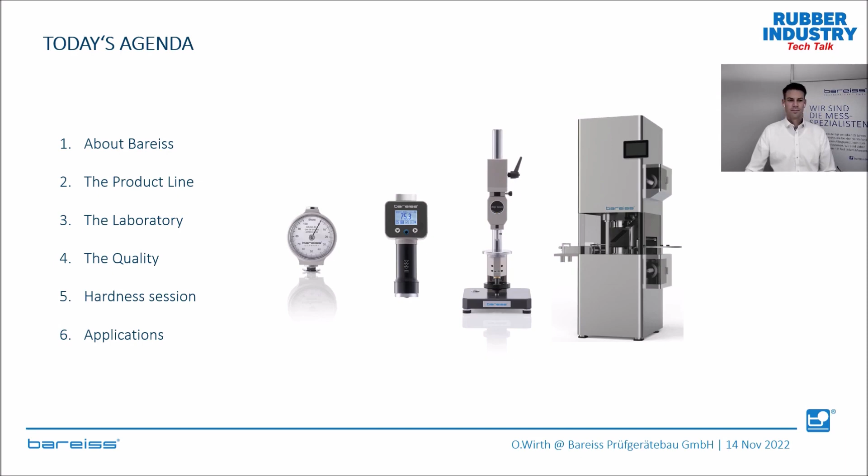So let's go back in history and see how it all began. Even as a child with limited resources, our grandfather Heinrich Bareiss had the technical skills to build models that could

fly and drive. After training as a mechanical engineer, he joined the Navy and spent the next 2.5 years on a submarine during World War II.

While spending the time on the water in the submarine at great depth, Heinrich came to the realization that the study of materials was of great importance.

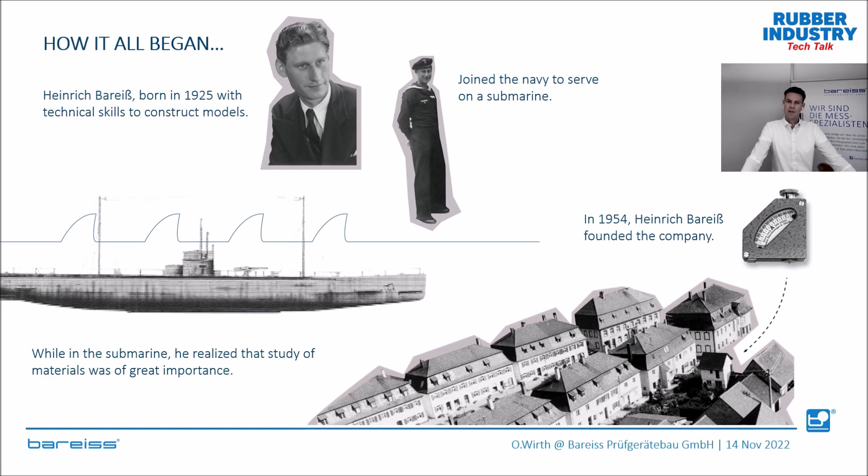In 1954, Heinrich Bareiss' vision to start manufacturing mechanical hardness testers became a reality. The company was founded in Upper Swabia, Germany, in the basement of a residence, which is only 100 meters away from the headquarters nowadays.

As you can see, Bareiss originally comes from hardness testing and made a lot of new inventions in that specific world. It all started with the mechanical durometer on the top left, followed by a test stand in 1961 and

the very first flexible tabletop devices in 1972. The corresponding up-to-date products can be seen on the right.

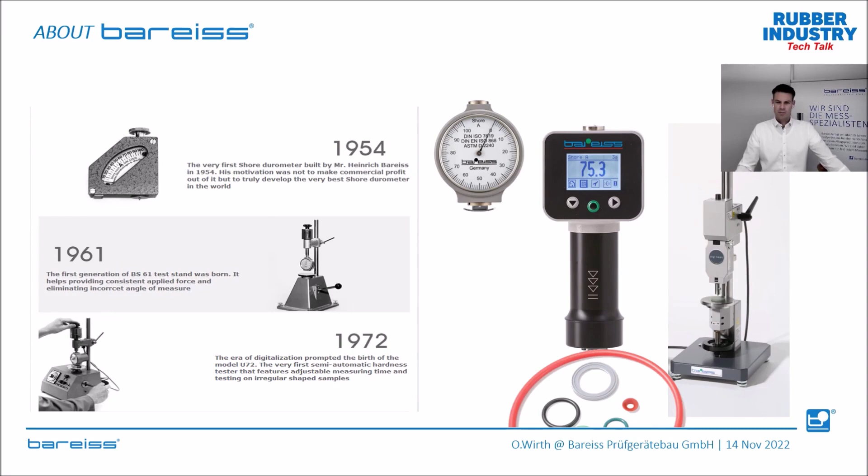But how does the company look like today? I just mentioned that the company was founded in 1954, and that we are a family-owned business in the third generation. Together with my cousin, Catherine Shen, I am the managing director of Bareiss.

We have 4 subsidiaries, including the location in Hong Kong, and we have a production area in Oberdischingen, Germany, of about 4,000 square meters.

One of the keys is the high in-house fabrication rate of almost 90%, which gives us the possibility to make quick changes in customized products and so on.

We have a lot of patents and obviously lots of customers worldwide.

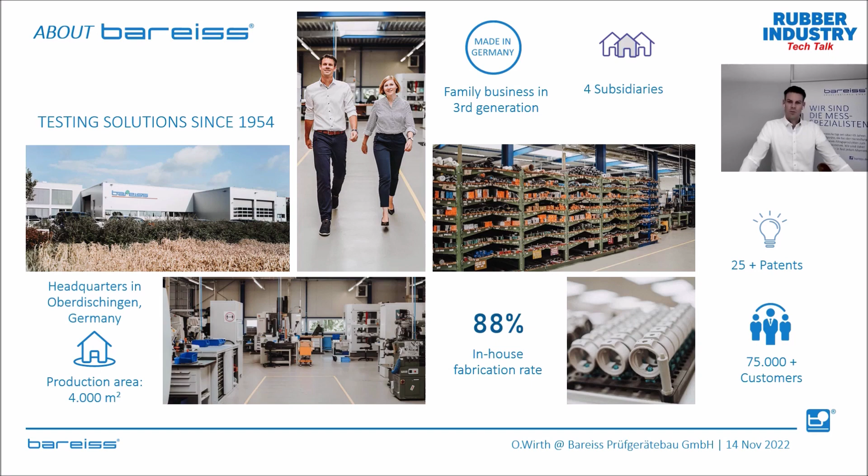So summarizing, we are a company with a high passion to develop new test methods, with a long background of experience.

In combination with our ISO 17025 accredited laboratory and the membership in various standard committees all over the world, like for example DIN in Germany and ASTM in the US, it is the best combination for you as a customer

to get more information about your materials. We are really dedicated to developing new test methods and to standardizing them.

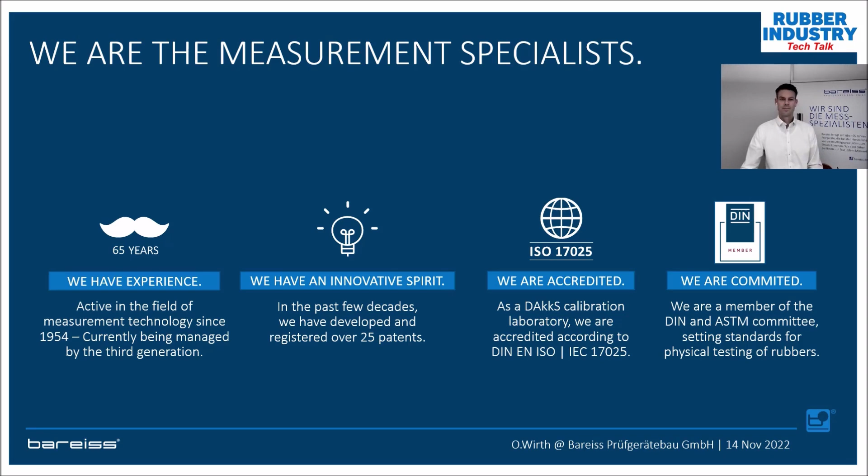We do have our own subsidiaries in China, in Taiwan, and Canada. But besides these locations, we have lots of resellers and distributors, as well as service partners all around the world.

We are located in 35 countries to offer our best support to you, so we are your partner worldwide.

To give a quick overview about our product portfolio, I listed the main products on this slide. Besides these, we also have products for sample preparation like punching presses and cutting devices, and also other physical

test products like compression set and so on.

On the next slides, we go a little bit more in detail into the different categories shown here: hardness, rebound resilience, abrasion testing, and rheology.

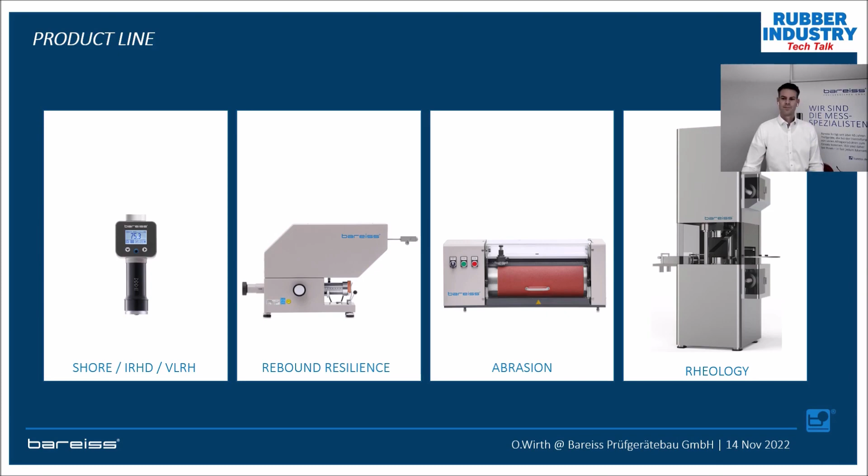Let's come to the hardness section. In this line, we offer all test methods ranging from 000S to Shore A to Shore D, as analog devices, analog durometers, and digital durometers as well.

But we also have the flexible tabletop devices for your laboratory, where you can have the test methods from all the Shore ranges up to all the IRHD and even VLRH.

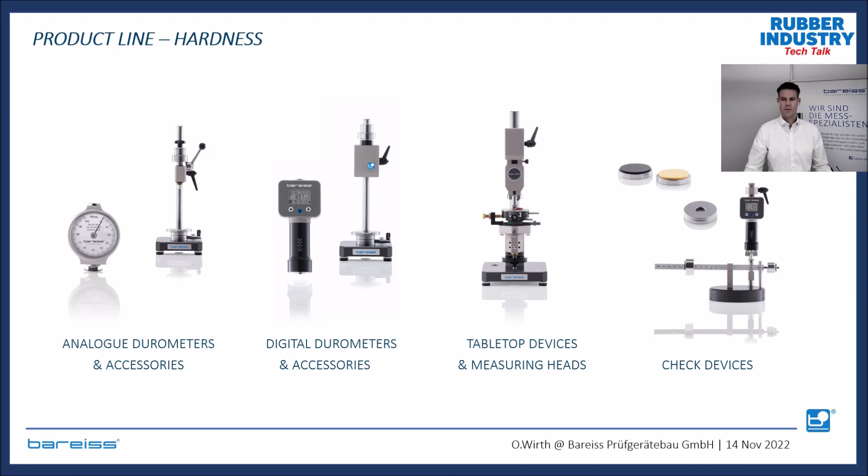And this is completed by various check devices that can be seen on the right, including test blocks that are also delivered together with ISO 17025 certificates.

And we do have the so-called Schob pendulum. This can also be purchased including a heating module and all the standard accessories.

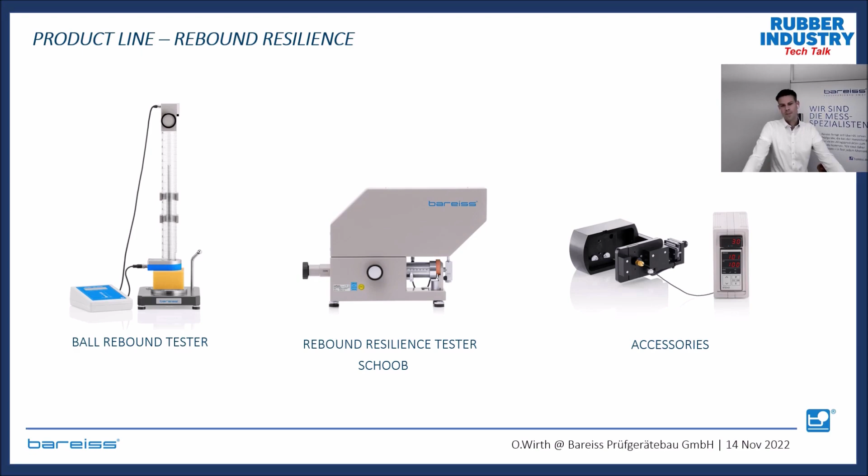This is the classical DIN abrasion tester on the left-hand side, including a cleaning device, but also available as a more advanced test method, including a heated drum. That means the drum itself can be heated from ambient temperature up to 100 degrees Celsius.

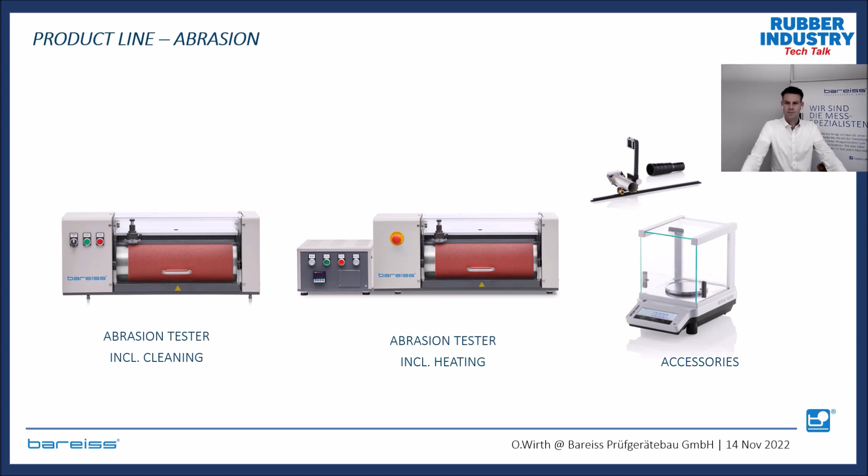And last but not least, we do offer the rheology products, but also automized machines ranging from a simple hardness and density tester up to a completely automized laboratory. For the rheology products, we will get more information in the next two sessions from Thomas and Henry.

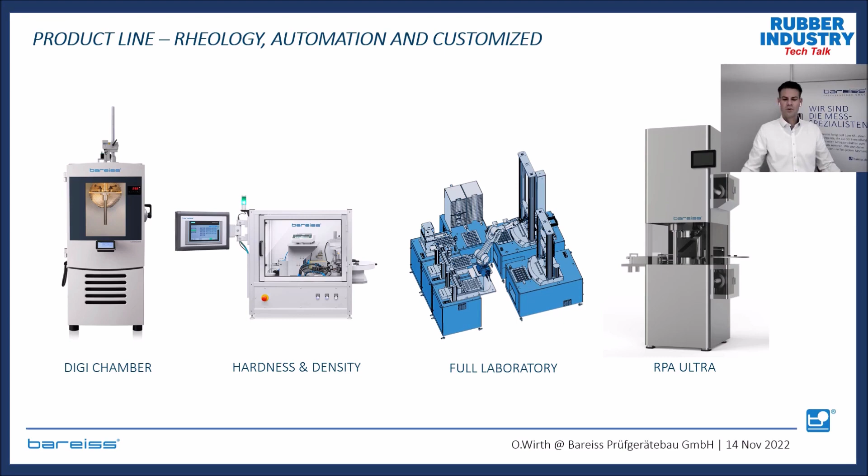So let's come to the laboratory. Together with the PTB, which is the highest national metrology institute in Germany, Bareiss created some of the most important standards in the field of hardness for rubber and plastics. For example, the calibration standard 18898, which is nowadays known as the ISO 48-9, VLRH, and many, many more.

The DAKKS is the German accreditation body for the laboratories following ISO 17025. But every country has their own national accreditation body. As they follow the same standards, they are within a network of mutual recognition agreements among accreditation bodies. This is mostly visualized by the blue logo, left of the DAKKS logo here.

So therefore, they can be seen as equal quality accreditation bodies. In Germany, for the DAKKS, the accreditations are carried out mostly by the PTB. So for you, the best combination is to purchase devices from a manufacturer that also has an ISO 17025 accredited laboratory.

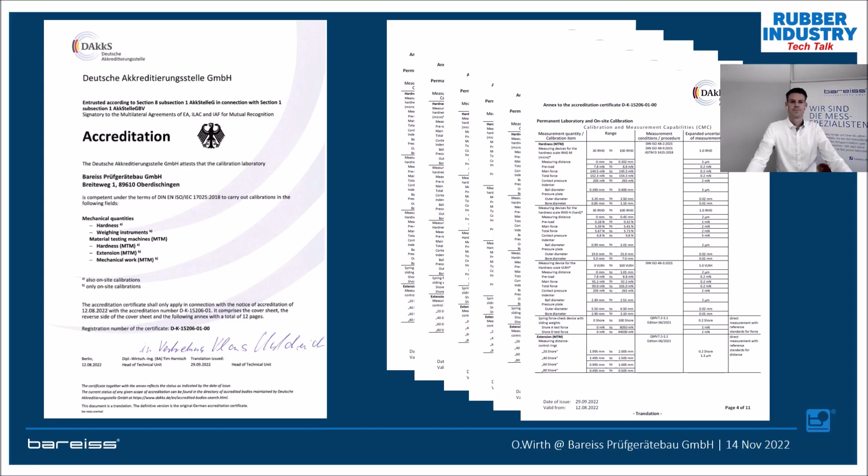Just one slide about measurement uncertainty. I don't want to bore you with this one, but it's necessary to know the difference between an ISO 17025 laboratory and a normal calibration lab. Uncertainty seems to be a negative word, but actually it's not. It does not mean being unsafe when measuring. It is paradox, but the uncertainty provides certainty to the conformity.

What does that mean? Every value, every reading that is within the green zone is within the conformance zone and totally correct. There is no discussion. The values located in the red zones are non-conform. There is also no discussion, so they are out of tolerance. The difficult part is the yellow zone, where we cannot definitely say that the values are correct and conform or not.

So the tolerance zone is given by these two lines here, the specification zone, and we have the tolerance. Even if values are within this tolerance zone, you cannot say, because of the measurement uncertainty, if the measurement is correct or not. The goal is to make this yellow part as small as possible.

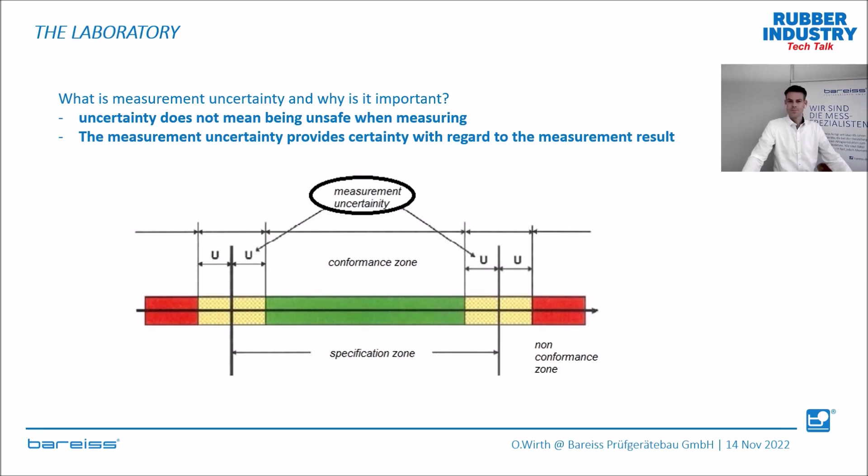Let's come to the quality of our devices. There are a lot of different hardness testers on the market from various manufacturers. Some of them are very cheap, so your question might be, for what reason should I spend more money on a durometer? What makes the difference? Well, the answer is quite simple.

The readings are more precise because of the high quality components we are using. Then we have very highly skilled employees that are professionals in building hardness testers, some of them for more than 30 to 40 years.

The springs inside a Bareiss durometer get a very special treatment before they can be used. This is necessary for long-term stability of the equipment. Even the ball bearings are handmade for every durometer, using different ball and bushing combinations. This will reduce the friction to a minimum and therefore shows exact readings, even if you have floating materials.

In this video, you can see a durometer from one of our competitors on a check device. By putting the weight on the left onto a defined position, you can double check if the value shown on the durometer is correct or not. What catches our eye is that every time we tip on the check device, we get different values, and this is due to the friction inside of the durometer.

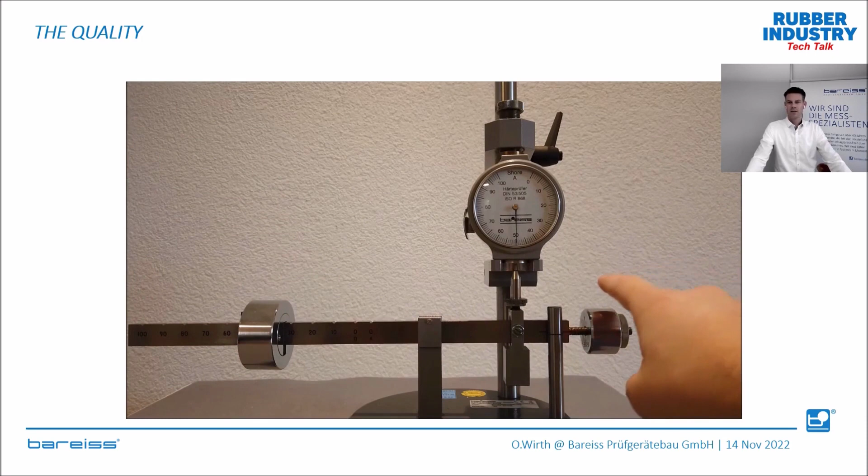Now we do the same on one of our own durometers, and you will see a completely different behavior. Every time we tip on the check device here, the needle comes back to exactly the same value after swinging around it. Now you might say this is probably a nice to have feature, but I will show you the importance on the next slide. Just wait for the video until it's finished.

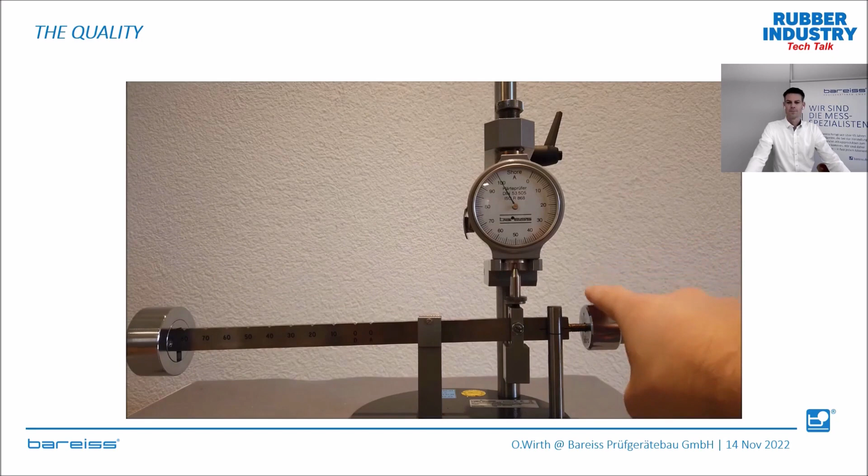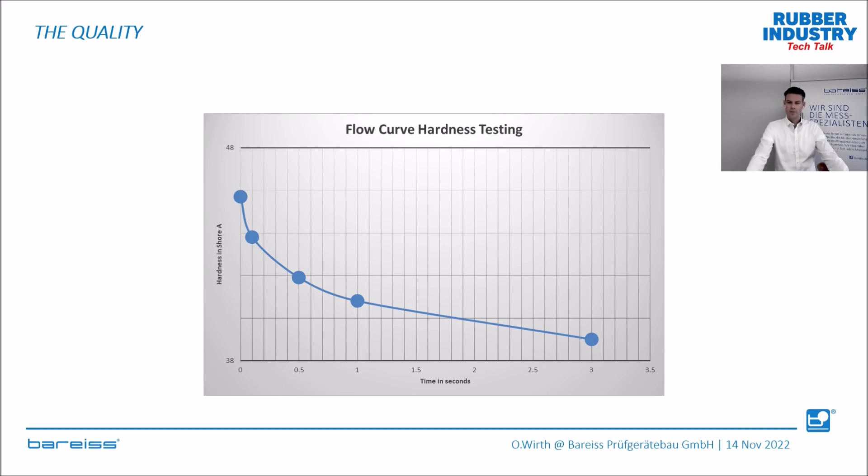This behavior happens normally so fast that you cannot see it with your eye, but it is definitely there.

So let's come to the hardness session. What is hardness? The definition is that hardness is a mechanical resistance of a material or a test piece to the mechanical penetration of an indenter.

Let's see in an overview the different scales that we have. On the left side, you can see all the multiple Shore variants that are available. As you will see on the next slides, they are used for different hardness ranges and therefore different sample geometries and materials. They all follow a linear scale from 0 to 100 and are good for flat surfaces.

We will see later on that Bareiss developed Shore A and Shore D measuring heads that can be used for all kinds of geometries, which is a huge improvement and helps many customers worldwide.

On the right side, you can see the IRHD scales, which is normal, hard, low, and micro. They are usually used in tabletop devices for production samples.

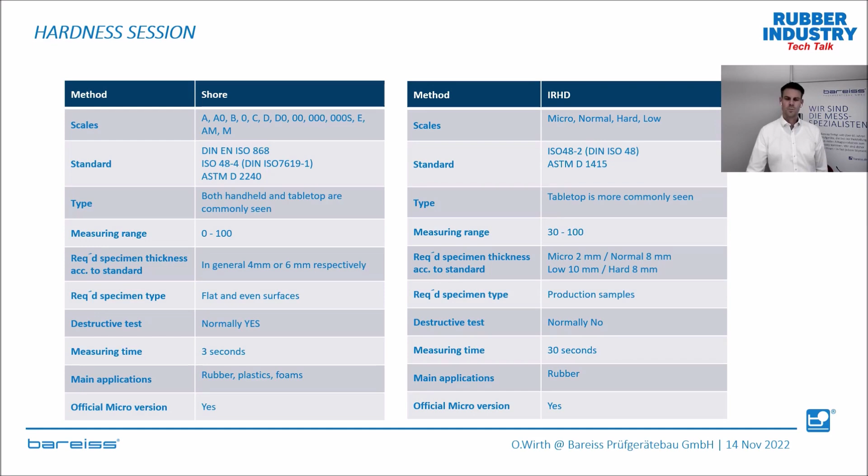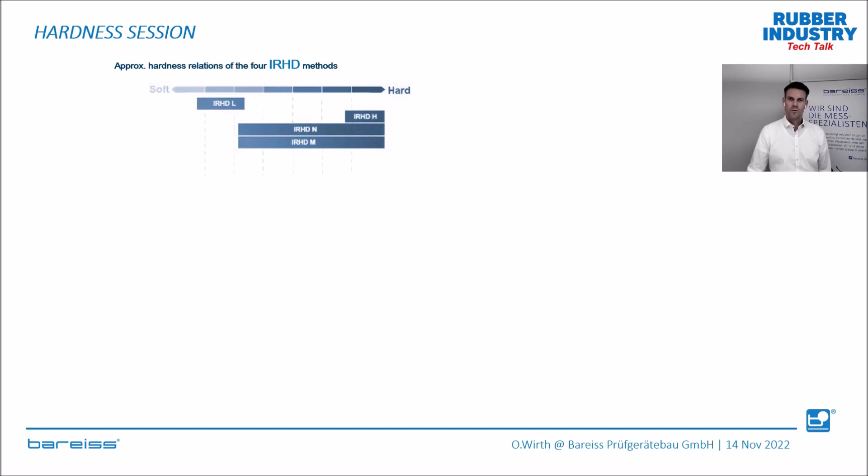Once again, a short visual overview over all the hardness scales. First of all, we have 4 different IRHD methods. For very soft rubbers, Bareiss introduced a standard some years ago called Very Low Rubber Hardness, VLRH. This test method gives the possibility to measure below IRHD normal with a very high differentiability. So you have 100 readings while you have just some values on IRHD low.

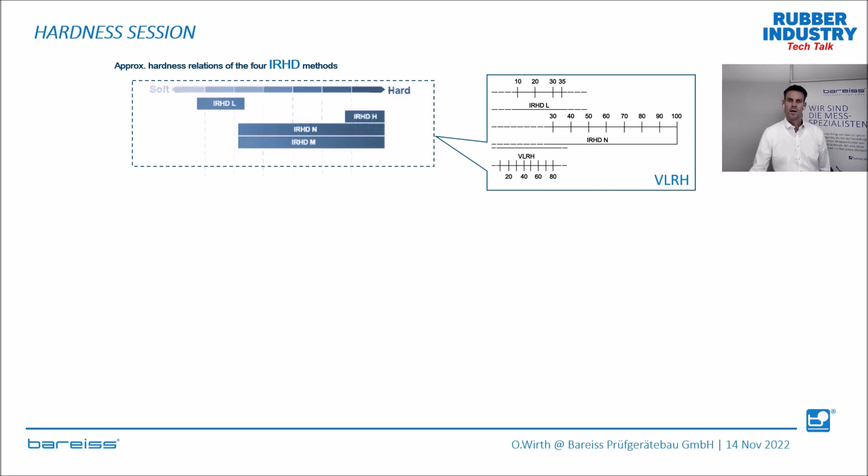And we have the Shore methods. The main scales are Shore A for rubber and Shore D for mainly plastics, meaning if the sample is harder than 90 Shore A, Shore D scale should be used. The zeros are mainly for foam-like materials, and there is a micro scale in the same hardness region as Shore A for thinner specimens, but this method is not used too much in the industry.

Therefore, Bareiss invented an alternative to this method, called Micro Shore A and Micro Shore D respectively, which is directly comparable to the real Shore A and Shore D values. But most of all, what the rubber industry is interested in are the scales Shore A, IRHD-N, IRHD-M, Shore A on curved surfaces, and Micro Shore A.

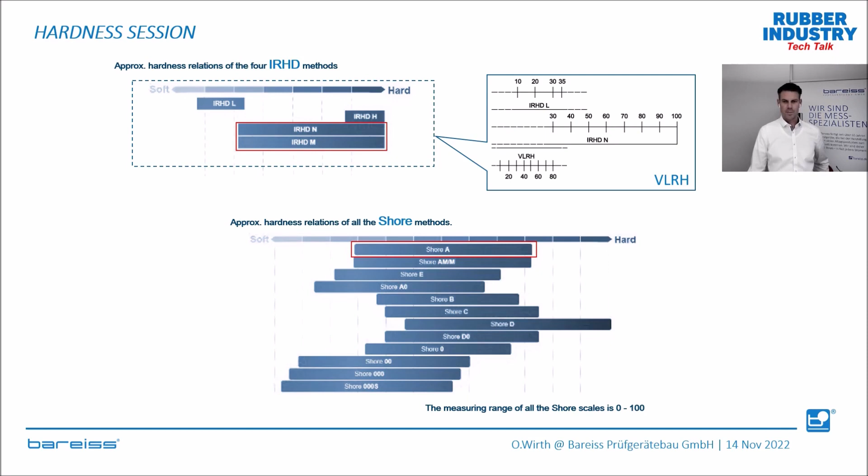The main organizations developing standards in this technical section are ISO, the International Standard Organization, and ASTM, the American Society for Testing and Materials. Three years ago, ISO decided to group all hardness standards for rubber and plastics in the ISO 48 family. To make it easier for you, I wrote the main topics of these standards right next to them.

The American analog to the ISO 48-4 is the ASTM D2240. And for plastics, there is the ISO 868. I will point out the differences later. For the sake of completeness, you can see the DIN EN 59 or ASTM D2583 respectively, which covers the barcol hardness. This is even harder than Shore D and is mainly used for composites like PCB materials and so on.

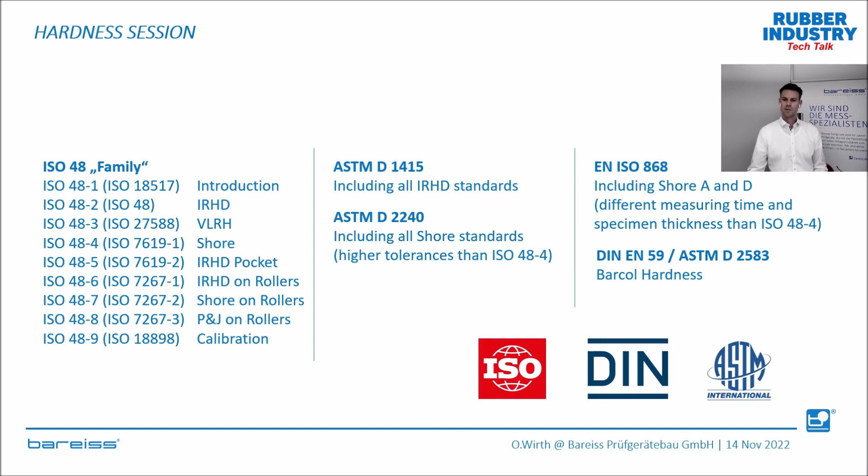On the next two slides, I will show you the differences between IRHD and Shore when it comes to sample thickness and the indenter geometry. So we have IRHD starting from an indenter size of 0.4 millimeters, going up to an indenter size with a diameter of 5 millimeters for IRHD-L. You can see the sample thickness ranging from 2 millimeters for IRHD-M up to 10 millimeters for IRHD-L. The ones that are mostly used in the industry, in the rubber industry at least, are IRHD-M and IRHD normal, like I mentioned before.

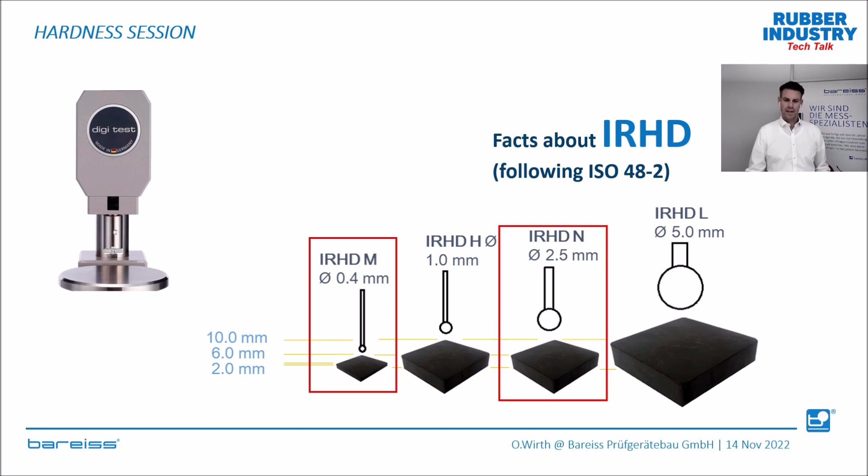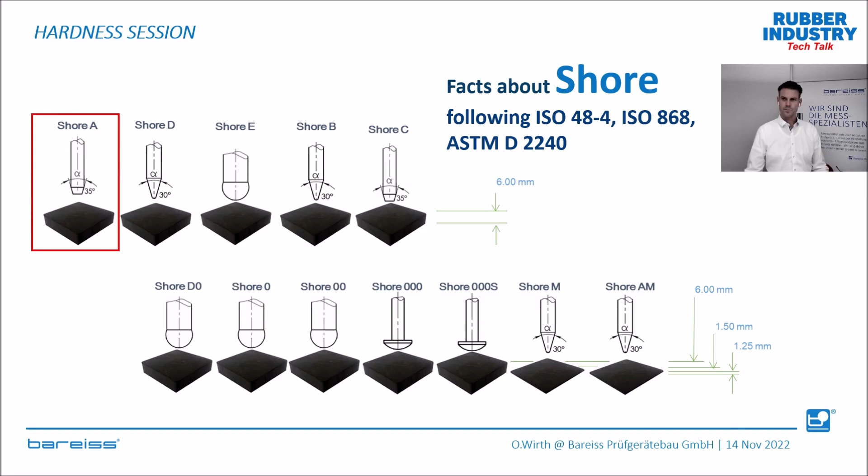The next thing I will show you is the difference in applying the force onto the indenter between IRHD and Shore. At IRHD, we have a dead load system, while we have a spring inside the Shore measuring heads. At IRHD, we have 3 forces, or 4, depending on how you count them. One is the force on the foot, which is the pressure plate. Then we have the contact force, which is the force at 0 degrees hardness. And the indenting force, which is applied onto the indenter after 5 seconds of contact force. All these forces result in the total force.

On the other side, with Shore measuring systems, you have springs starting from 764 millinewton up to 44,450 millinewton, with contact forces starting from 250 grams up to 5 kilograms. And these forces can either be achieved by hand or using a test stand.

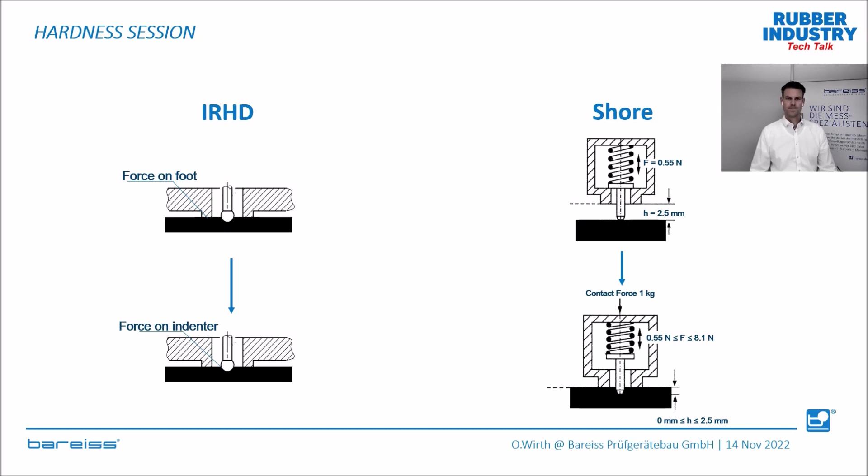So now we already talked about the geometries of the indenter, we had the forces, and now the third thing, which is very important, is the indentation depth. Here you can see the main difference between IRHD and Shore. While we have a linear system in the Shore scale, we have a nonlinear behavior with IRHD. The indentation depth, which is taken here on the right side, for example, the 2.5 millimeters, this is a system like it is used in Shore A, but there are also other ones ranging from 1.25 to 5 millimeters.

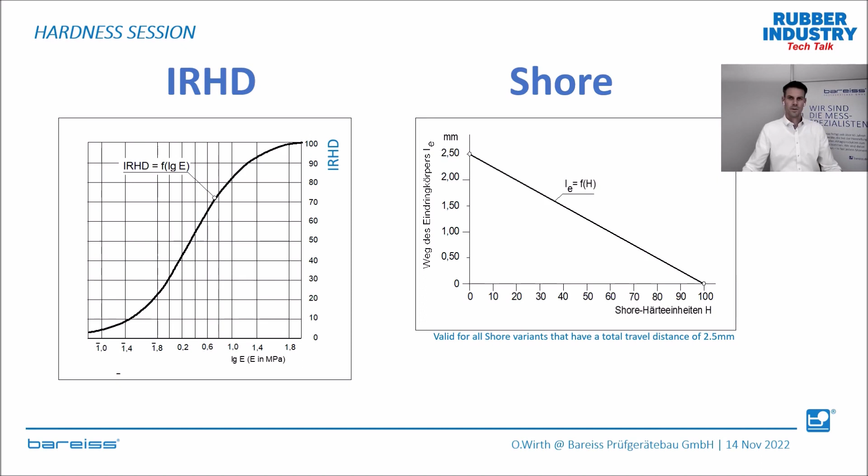Let's come to the last section, which is the application. It is very important to know what a hardness tester can do, but even more interesting and helpful is to know the limits of these devices. In other words, what your durometer cannot do. So here we can see that we can measure with a durometer, with an analog one, on flat surfaces with thickness above 6 millimeters according to the standard. What we cannot do is measure on finished parts.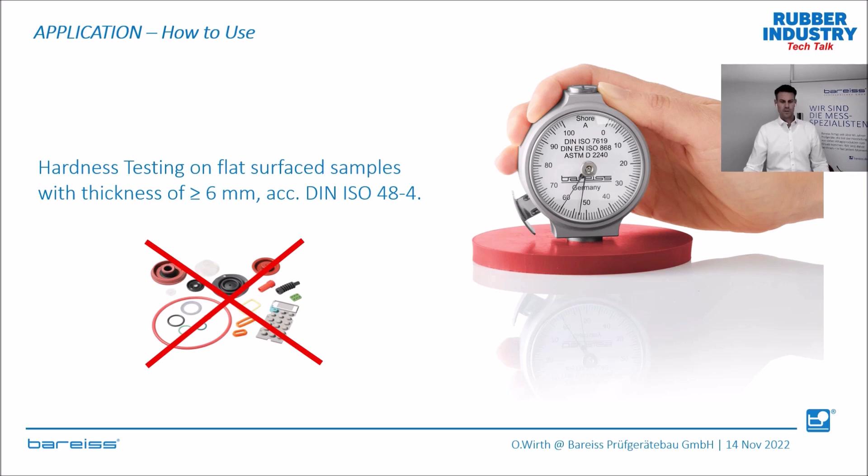Once again, how can we use a durometer? The only way to achieve an accurate and correct reading is to understand the limits of the devices, like the following. You have to measure perpendicular to the sample surface. The sample size or thickness has to be in the range which is mentioned in the standard. Here it is Shore A for 6 millimeters. You can only measure the hardness on flat and parallel surfaces, so for example O-rings cannot be measured. And you have to read the result after a certain time, because your material can be floating, can be a floating one, and also the quality makes a difference, like we've seen in the video before.

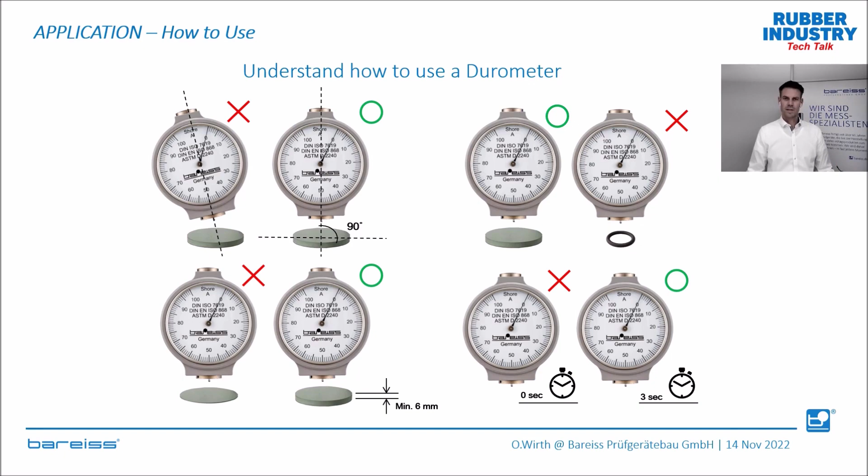So we just learned that we cannot use the analog durometer at all times, and that sometimes it's very inaccurate to measure the hardness. From this, we made 2 subsequent developments that were all patented, and they are often copied. You will find the Bareiss developments all over the world.

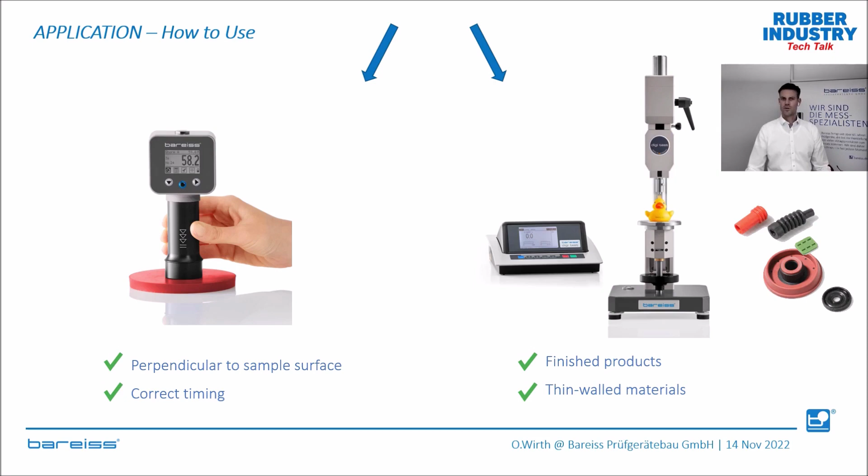We can deliver the whole range of test methods available for rubber and plastics, starting from IRHD, Shore, and VLRH. Even better, the full range can be purchased including an ISO 17025 calibration certificate, which gives you maximum reliability on your measurement results. But once again, the ones used in the rubber industry are mainly the ones shown in the red boxes here.

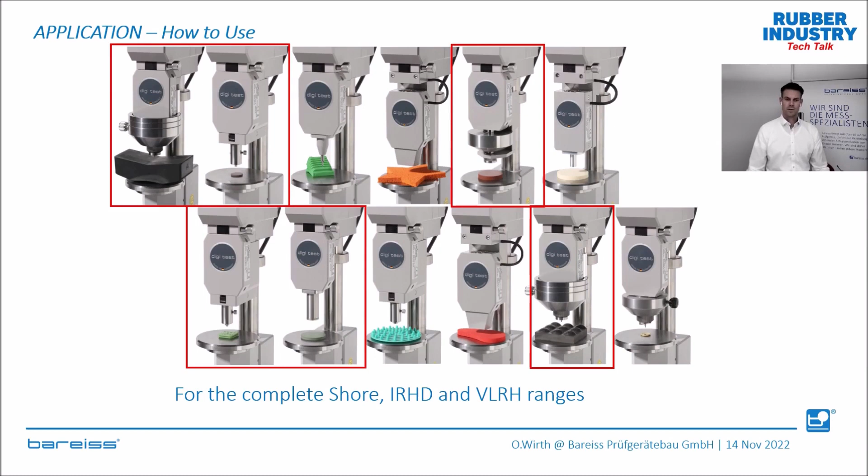What is so special about our Digitest 2 that we've seen in the slides before? Like I mentioned, you can also measure on finished parts that can be convex or concave. This is a development made by Bareiss in 1972, when we saw a strong need for this ability in the Shore scale. The result: Shore A/B/0 and Shore D/C/D0 respectively.

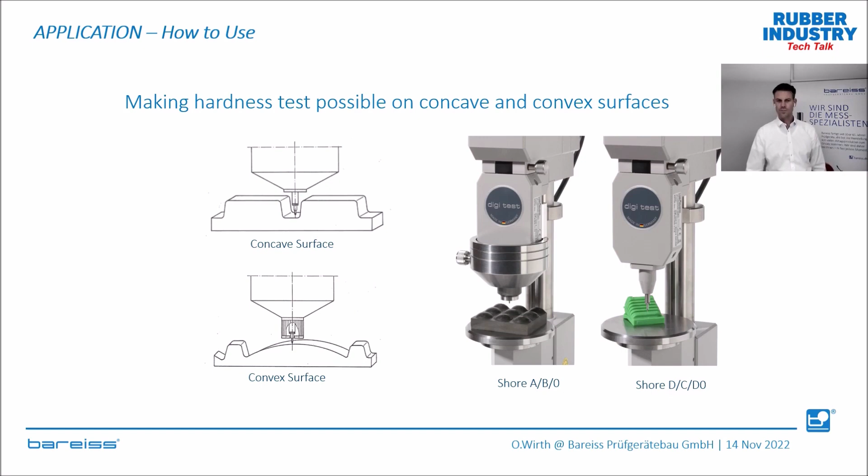A good, reliable, and reproducible result can only be achieved by two factors: the measuring device and the correct sample preparation. You can have the best hardness tester and still not get good results if you don't have the right sample fixture. Therefore, we offer a wide range of fixtures.

For example, here you can see one for wires, one for hoses, O-rings, and a universal bench vise. Over the decades we made a vast number of customized fixtures, and we offer the service that you can send the sample to us and we consult you with the solution. This is included in our service.

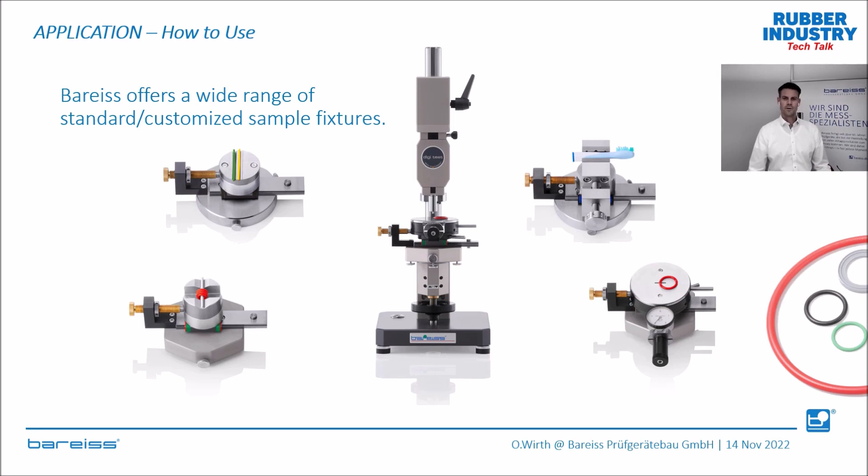It is even possible to add small automation to your Digitest, also to existing devices, by an easy upgrade. Two of these can be seen here. The Rotofix on the left side offers the capability to measure a various number of samples without user intervention. The Barofix III, on the right side, will do laser centering of O-rings, because it is very important to measure hardness on O-rings at the highest precision.

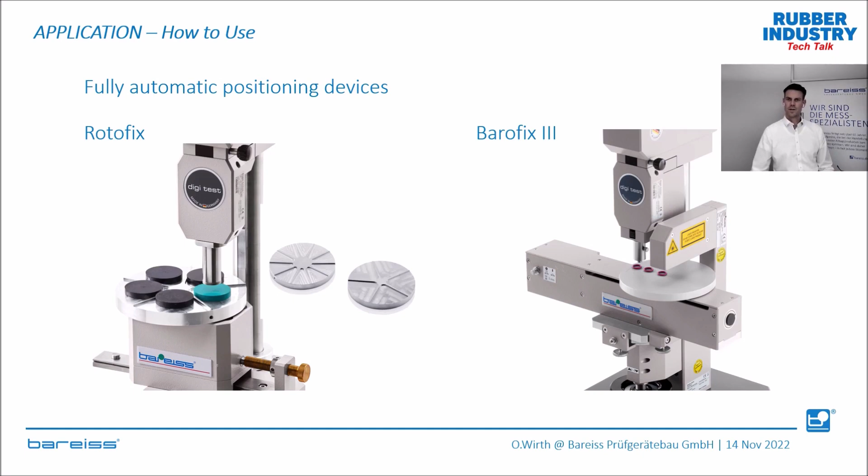Let's come to the next application. For some applications, it is necessary to know the physical properties apart from ambient temperature. In this case, it is helpful to test the hardness inside a temperature chamber. We developed a system which integrates the hardness tester into a temperature chamber to reach temperatures ranging from -70 degrees Celsius up to 180 degrees Celsius.

To reduce the temperature influence on the measuring system itself, all parts that don't necessarily have to be inside the chamber are outside, such as, for example, the measuring head, pickup bracket, and the electronics.

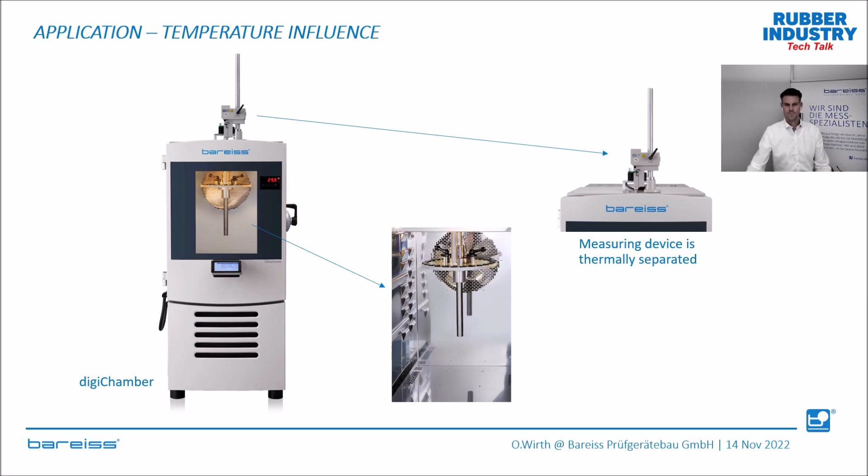To reach a homogeneous temperature inside the sample, it takes a certain time, depending on the material and the geometry itself. Therefore, the chamber comes with automation and smart software to set up a test sequence. This makes it possible to control both the chamber and the hardness tester. A very easy and intuitive system to use.

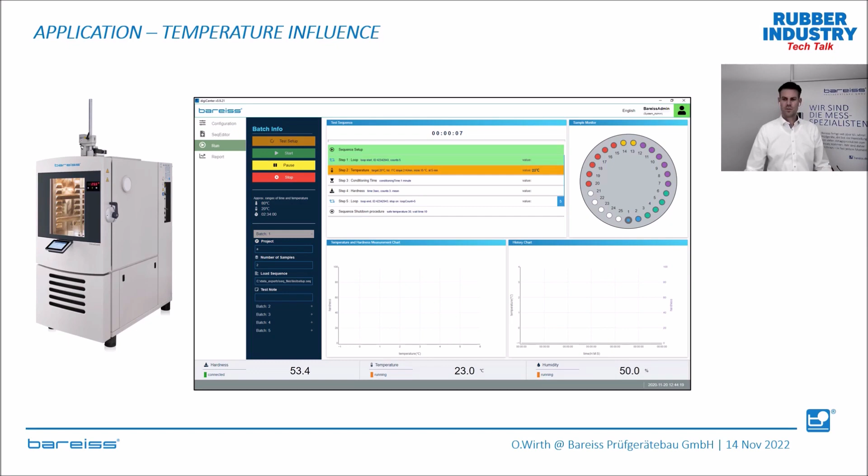This is an example of 5 different tire compounds measured for one of our customers. The x-axis ranges from plus 60 degrees Celsius on the left side to minus 40 degrees Celsius on the right side. And you can see that the behavior of these 5 compounds is totally different.

We have materials that are very soft in the range of about 60 degrees Celsius, for example the dark blue one, but will get very hard at low temperatures, almost 90 Shore A. While there are also materials that have an increase in hardness of only 18 Shore A values, for example the green curve here. So it makes a huge difference.

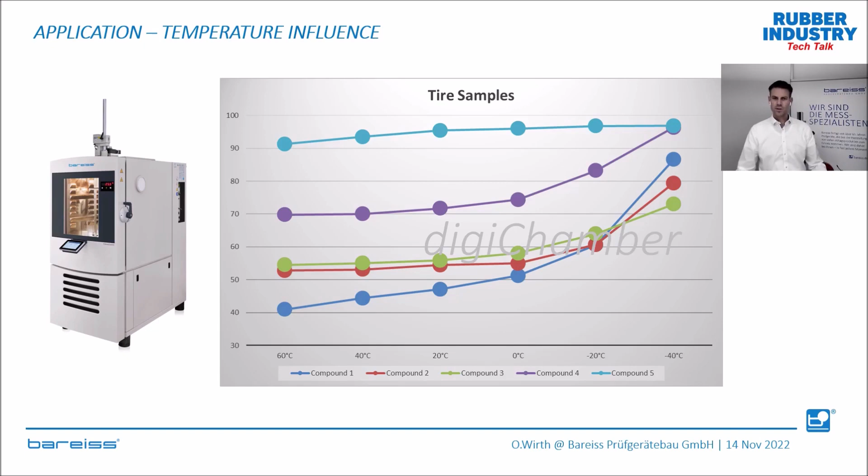Let's come to the second and last application for today, which is hysteresis. At the hysteresis measurement, we take a dead load system and apply a force onto the material, then we measure for 99 seconds, then we reduce the major load and measure for another 99 seconds.

So we have a loading curve on the very left side, and an unloading curve on the right side. This was measured on the same material with different heating times. The materials were cured to 100% or only 50% time, and therefore you can see different loading and unloading curves here.

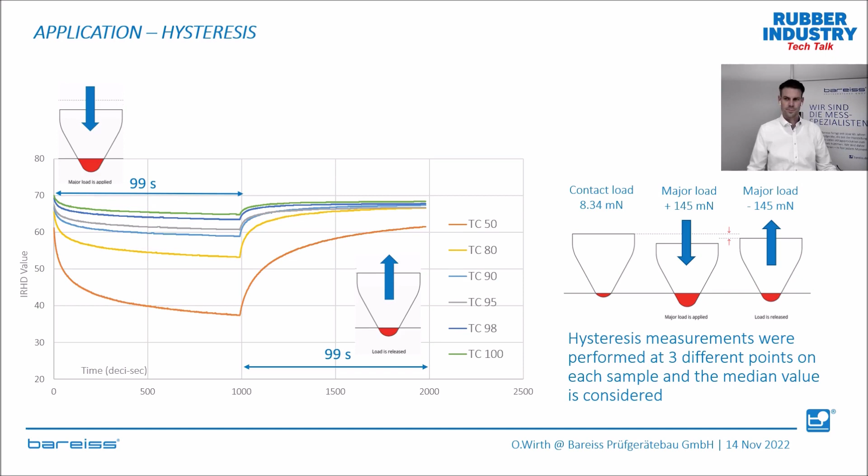This can be used to analyze and decide if the product quality is good enough before putting it into production. It accelerates the process of decision making and prototype approvals. It saves energy, time, and wastage, and increases sustainability of the process.